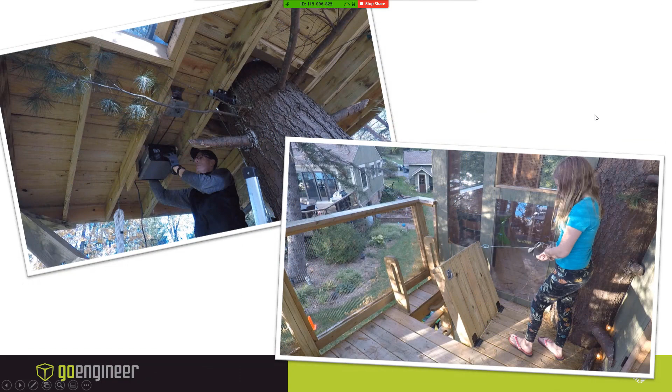A few summers ago, I built this beautiful treehouse and used weldment functionality, but with wood profiles. You get the same type of feedback with a nice cut list, but it's a great way to vet your project. Now, a treehouse isn't really good unless it's fully equipped with a garage door opener, so my daughters helped me do that last summer. Now all we have to do is hit a button and the trap door opens and closes. Some great things happening. And of course, I vet everything in SOLIDWORKS - it's just how I do things.

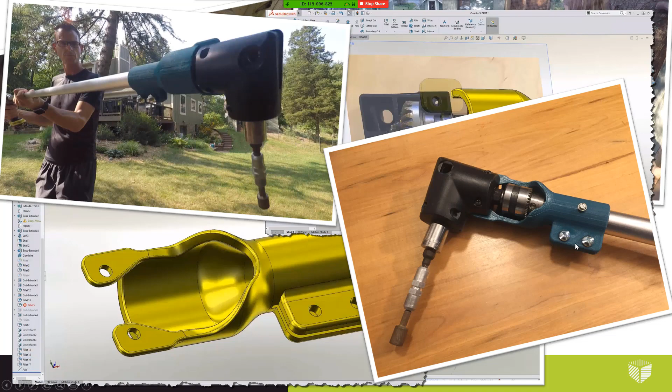So I'm a big fan of 3D printing - you're going to see a lot of that again on our YouTube channel. Whenever you get a chance, 3D printing is a fantastic technology that's really just getting better. I saw my first 3D printer in 1989, and it was what sparked me to become an engineer in the first place. To this day, I use mine at home often to repurpose things. In this case, I wanted to fit something that looked like it was meant to be on my boat, so I chopped up a trolling motor and repurposed it with a couple nice parts that were designed in SOLIDWORKS.

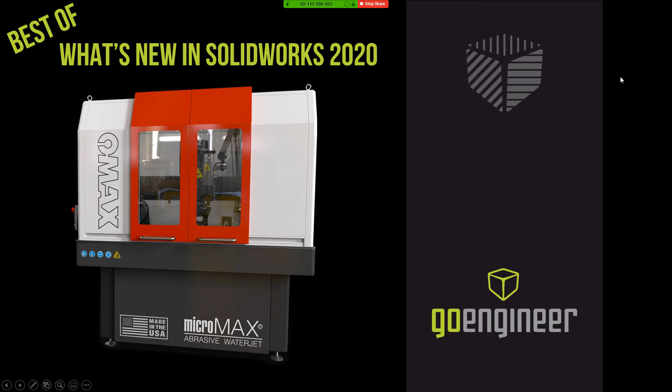We're going to stick to three themes. SOLIDWORKS is always good about sticking to a particular topic. We're using some files from one of our customers, Omax - they're an abrasive water jet cutting machine company, and it's a really fantastic product which fits well with the things we're about to show.

So we're going to start with improve performance. The first thing is detailing mode - this is something you're going to have to feel on your own systems to really get the idea. What's happening with detailing mode is we're opening up the drawing without even having to have the models or assemblies resident. It's different than the old detached drawings. You can take this drawing, send it to somebody in email, and they'd be able to open it up in detailing mode and do 90% of what you'd typically do - add annotations, details, move things around, add things like that.

So I'm going to show you a few things we can do right here, but the main thing you'll have to feel is how quickly this happens on your own documents. We're just going to do a basic file open here - I want you to see how fast this actually is. When we select our drawing, you're going to see a new mode selector. This is part of the user interface, and it gives you an idea of what can happen in any one of these different modes and what's accessible. We're going to open this up in detailing mode and watch what happens here - this is a 5,500 part assembly.

I just clicked open, and you can try to count, but it's only going to take about 5 seconds for this thing to fully open. It's a pretty tremendous thing. All the line art is here. The assemblies aren't even resident in memory, so the math footprint is reduced incredibly.

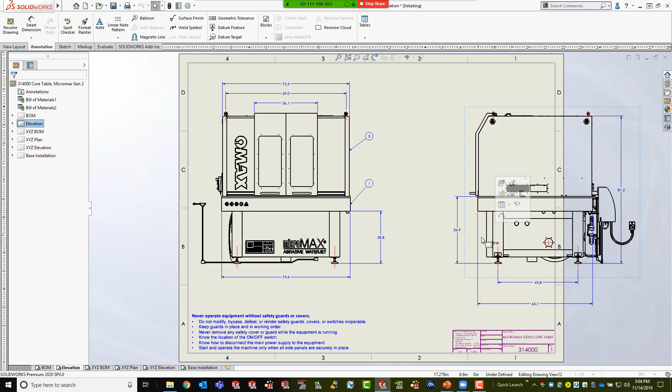These views can be removed and moved. Annotations can be tweaked if necessary, as you can see. And then basic things like cut, copy, and paste are available here as well.

Now we can add sheets and again do the 90th percentile of things that need to happen. Maybe paste this view back onto this sheet and put it wherever it needs to be, even reorganize things as necessary. The main part about this, though, is that it could be a lesser skilled or a lesser overhead employee taking care of these things that are really just the necessary things to get a project done.

And when it comes to annotations, there's a lot of different ways to do these. Things that I like to show here, just like anything else we do in SOLIDWORKS on the Windows interface, is going to be available based on whether these buttons are even available to you. So that's your first prompter of whether or not these functions are even available.

So things like just adding annotations and doing these in our Smart Rapid Dimension mode is a pretty typical way. One of the things I like to show quite often is that there's functionality that a lot of users overlook, things like these little dimension palettes. It's really easy to go ahead and add little annotations and tweaks, maybe add the word typical here. Oop, little fat finger there, excuse me.

You know this is live. And there's other things that we've added too.

Like in 2019, we took bill of materials, and if you selected them, you could make them all uppercase. Well, we've actually added that here to dimensions. So if you select it and say all uppercase, it wouldn't matter how the annotation was populated. It's going to take care of it and show it in a more appropriate manner.

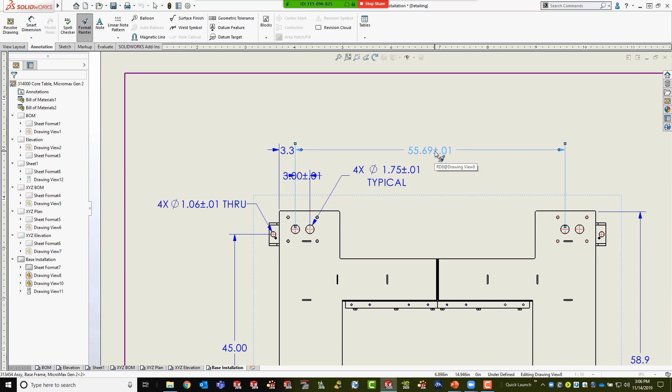A couple of the other things I love to show are things like Format Painter. This has been in the software for almost 20 years, but when you simply select an annotation and then click other annotations, it takes the format from the original source and simply pastes it to the rest of those. Really, really easy stuff.

The main thing that I want to show you with this, though, is the fact that you can do almost anything here, even up to the point where you're going to save, and you still wouldn't need to have access to the files. Now, at this point, when you do go ahead and try and save this document, it is going to prompt you for a little bit about what's going on.

And if you feel the need to, you could resolve this at this point, but there is the ability to save without resolving. In my particular case, we're going to go ahead and save without resolving, but we're going to do what is typically done with these large assembly drawings. And that's not necessarily saved as a SOLIDWORKS file, but saved as a PDF or a DXF or a DWG. Because the line art's resident, we can do this.

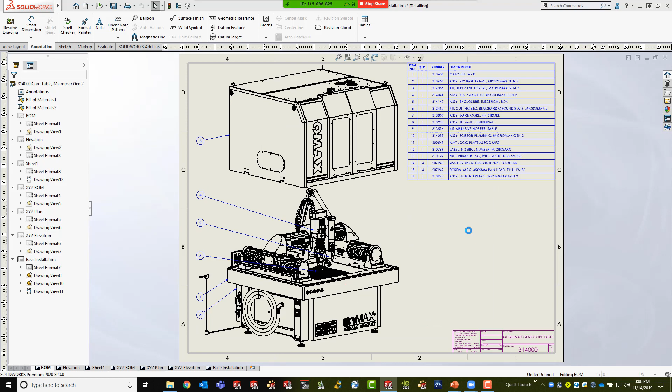Now, when I go ahead and save this particular document, what we're going to see is just how pristine the line art is. Really, that's the main thing that's there, but it's the rapid, most common operation here with these really large drawings. Now that popped up over on my other monitor, so let me pop this over. But you can see very cleanly that all the drawings look there, the revision clouds I placed are there. Really fantastic functionality. So do this on files that you're intimate with.

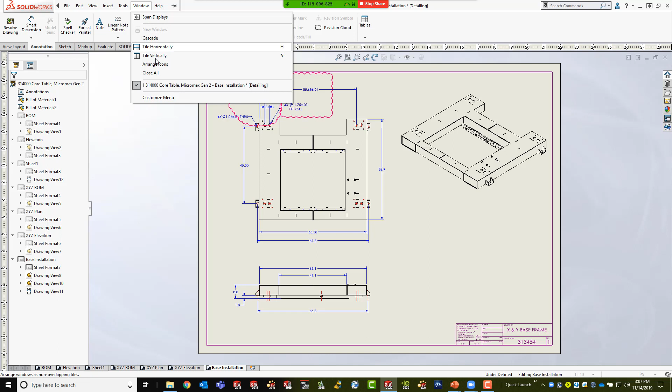You're only really going to feel the functionality when you open up a large assembly that you yourself have struggled with waiting for the drawing to open up, and in many cases, again, just for these lower level functionality and tasks.

One of my favorites, though, without a doubt.

Now we're going to move to envelopes. This is an interesting functionality because it has to do with external relationships and how parts interact with other parts within an assembly.

With the topic of external relationships, there's functionality under Tools and Options, your gear icon at the top, that enables you to control when and where somebody can add a relationship. In some cases, people get top-down relationships accidentally because they edit a sketch and accidentally drag it to an edge of a part, creating a coincidence.

This enables or disables the ability to have that happen outside of an envelope functionality, which I'm going to show you now, or within the top-level assembly, and maybe only allowing it at the same sub-assembly level. So there's greater control over where those external relationships can even proactively or accidentally be applied.

Now when it comes to envelopes, I want to show this to you live in a couple of different ways, and I got to set this up a little bit using my OMAX machine. Envelopes usually represent a particular area - either a keep-out area, a work zone, or maybe in a reach study.

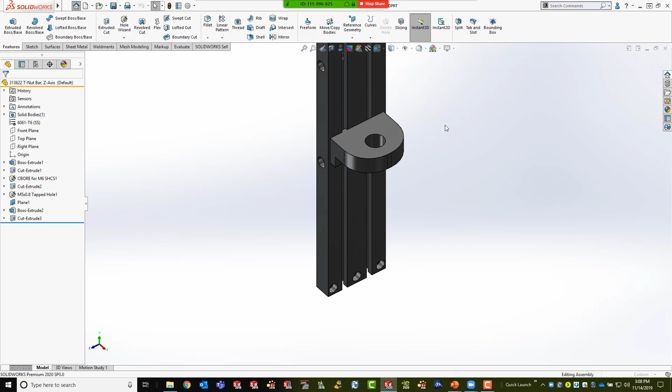In our particular case, what an envelope is going to represent is the cross-pollination, if you will, of data from one file to another, in order to create more appropriate links in the file in which those relationships or references should take place. I'm going to do that right now by opening up a couple of parts here.

So we've got some plumbing that I've just opened, and we've also got a bracket. What I want to do is open up the bed assembly in this OMAX abrasive water jet just to give you a little context of what we're talking about.

Now you see the plumbing hanging right off to the right-hand side. The bracket that I opened is actually part of the subassembly you see in the middle. For the sake of proper compartmentalization, this is the proper way to set this assembly up. But at the top level assembly, this head and this plumbing assembly need to interact with each other.

This is where a lot of overhead on the system takes place, and frankly it just becomes a more difficult operation, because now I have to turn this into a flexible subassembly, and now we have mates solving at the top level as well. Well, we can absolve this of all of that overhead by using envelopes.

Let me show you what this does. So to remind you, back here we have our plumbing subassembly, and all it is is just piping and fittings. Back here at the top level assembly, I have a bracket right here in the middle, and I need my plumbing to interact with that.

So we use this button at the top called Envelope Publisher. Now when you select it, the interface here is real simple. We're picking the components that we want to push down into other subassemblies. Doesn't matter where they reside, but we're going to push those references into the other subassemblies.

So I'm going to pick this bracket. Then we select the subassembly or assemblies that we want to do this in, and it could be multiple simultaneously. For our sake right here, what I'm going to do is just select from the feature tree so it's real clear to you - we're going to put this into this scissors assembly.

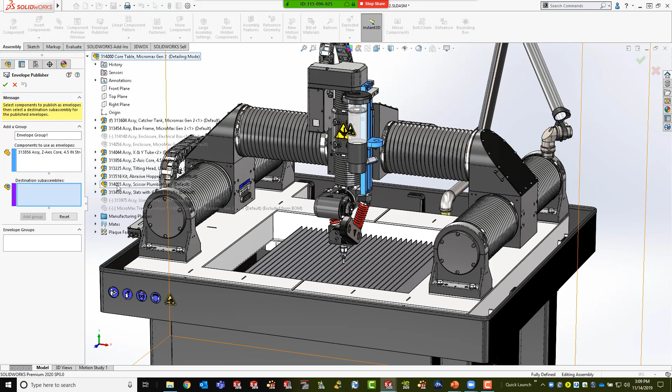And when you click Add Group, this is an opportunity for you to do this over and over with different references before exiting the tool. Groups are used in a lot of different places. So once this is done, it creates the group.

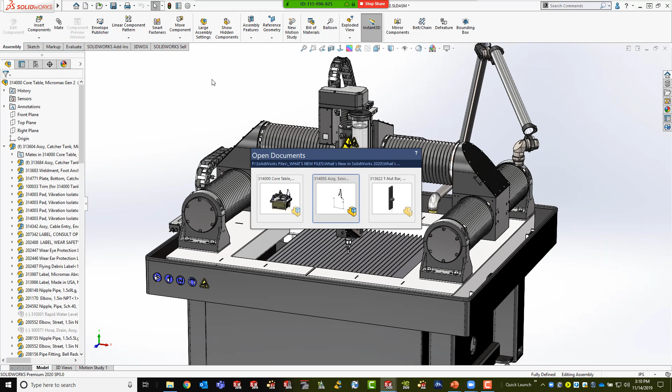What it effectively does is create a reference from the central assembly, from that head assembly, over to the plumbing assembly. Let me show you how this plays out. Once we go ahead and say OK to this, I'm going to toggle back over to my plumbing assembly. Take a look at this.

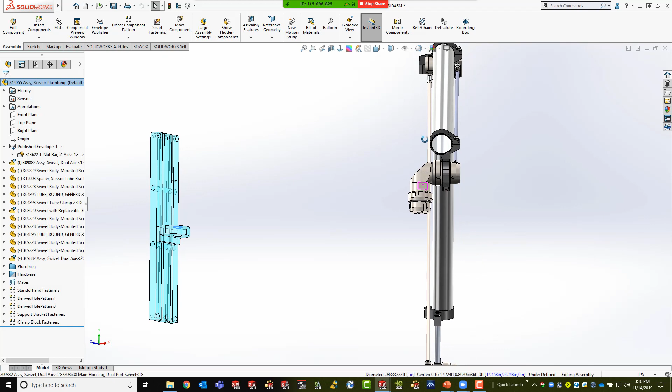What we now have is a transparent representation and an envelope folder here containing these, that shows us the exact position of this part in the other subassembly at the top level where that envelope was created. The purpose here is that I can now create the reference to that part here at the subassembly. So here we can easily go ahead and put an edge selection, maybe grab our plumbing, and let's just go ahead and use a little profile center mate.

Now the parts can move because the mates solve here. And because we're referencing that part now at this subassembly, as we toggle back over to the top level assembly, our plumbing is going to be in the proper position.

Now the reference didn't have to take place at the top level assembly. It's the way the envelope pushes down. If this head assembly ever moves, the bracket moves, and of course the reference in this scissor subassembly is going to have to move as well. So it's a great effective way to make this happen.

Now we have limited time here today, but I want to show you a second example of this because I think this captures more of what a lot of you might do out there. This assembly I've been using since 1998, so it's officially, at least in Michigan, old enough to purchase alcohol.

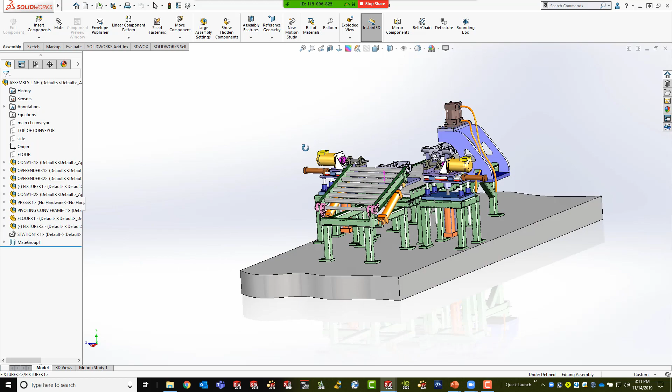What I have happening as context here is we have a subassembly of an assembly line. In this particular area we have a press which happens to be floating in the middle of space with a stand that's yet to be generated.

If we open this press in its own window—of course those are old files—you can see that again it's just floating in its own window.

So back at the top level assembly, I'm going to use the envelope publisher to push the floor from whichever subassembly or level of the assembly it's in down into the press assembly. Simple. I could press all the assemblies I wanted to and put that floor in them all simultaneously.

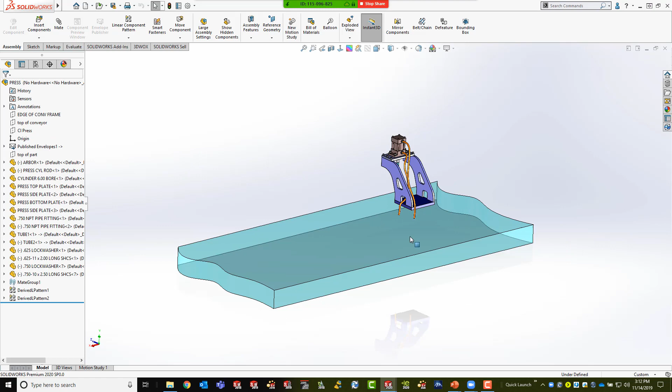When we toggle back over to the press subassembly, you're going to see now that we have that reference down there. And now real easily, all I actually have to do is create a basic feature.

Here we're going to go ahead and put in a sketch. We're going to do some offset entities, which is going to be real quick. And then I want to just go ahead and create a nice extrusion here.

So again, basic features. We're going to extrude this, double clicking our face up to surface. So there we have it. We have a feature that's now referencing the floor in this assembly.

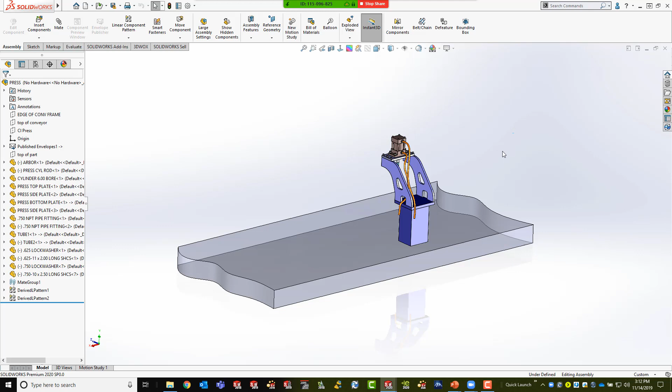Now when you go back to the top level assembly—this is why I wanted to show you this—we're going to make a change now that changes the floor. And as you do this, it's going to reveal the fact that the floor is actually concealing that little envelope graphically.

Now, of course, if the floor moves, the envelope created from it moves, which means all of our references update. Here's a little rebuild, and there you go. So I think it's fantastic functionality.

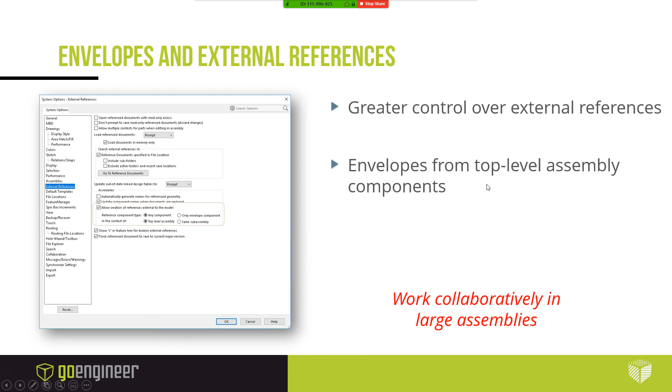It will definitely enable or promote performance because it won't require you to have to do as much flexible subassembly capabilities at that top level assembly. Really, really great stuff though. Okay, let's keep moving here.

So we're going to get into this next one here, flexible components. And this is going to be the last of the ones that are really, really detailed demonstration live for you. Because this one here is really awesome, but I feel that you need to know how it's set up.

Because what it's set to do is turn a part that's rigid, which all of our parts are built as rigid nominal parts, and it turns it into a part that will now flex and move much like a spring or a boot would based on some part references.

But what we're really doing is we're remapping some external references. What that actually means is that we have to create those external references to begin with in order to be able to remap. And that's where I want to show you where this thing works.

So let's go back into SOLIDWORKS here. And again, we've got some really great videos online that take a look at this. I did a top 5 video that's on our webpage as well that really explains this out.

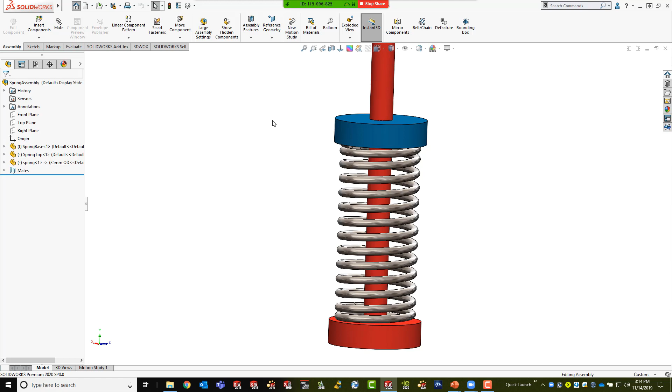So I've got 2 different assemblies that I want to open here for you just to give you the context. These are the sample files that actually install with SOLIDWORKS 2020, so you can try these yourself if you'd like. What we've done over in the right-hand assembly is we've created a spring, and the spring's functionality rebuilds or updates when we change where this blue part happens to be.

Now we do this in user groups and in videos all the time to show you how you can have a sketch reference for a sweep down the middle, and that sketch referencing the blue part and the red part.

As the blue part changes, the length of the red part, the sketch line, changes, which then updates the spring. There are ways you can search out how to set this up. The main thing happening here is that the spring has a top-down relationship in the form of a plane, and that plane is coincident to the bottom of the blue part for this example.

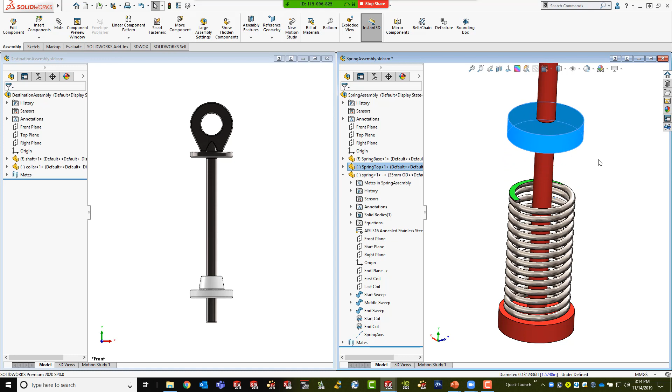So in this assembly, we've generated this relationship so that if the blue part moves, the plane moves, therefore your spring compresses or extends. That's something people have been able to do for a long time, but this is where it always falls apart.

What I want to do now is use that spring in another subassembly. That's where it would give you an error in previous releases of SOLIDWORKS that says this part has top-down relationships created in another assembly.

Now we're going to allow us to reassociate that relationship to this part. We'll do it simply. There happens to be an axis down the middle of this part, and we're just going to mate these parts up so we can locate them.

Easy enough. Down at the bottom, we've got a simple ground face, and that's going to be coincident to this top part. Nothing mystical there. What we've generated now is a part coincident to a part. So as we move it, they move.

Here's the magic: pick on the spring and click this button called Make Part Flexible. Once we do, it reveals that top-down relationship we designed in this seed subassembly and allows us to re-reference it in this assembly by simply picking a face.

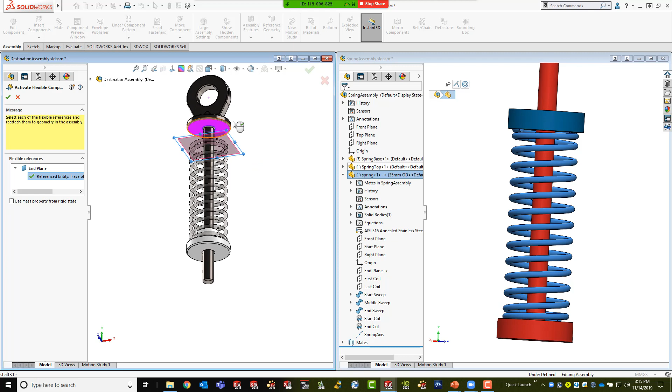What we've now done is repurposed that part and turned it into a part that, as it moves, is going to automatically update and expand or compress.

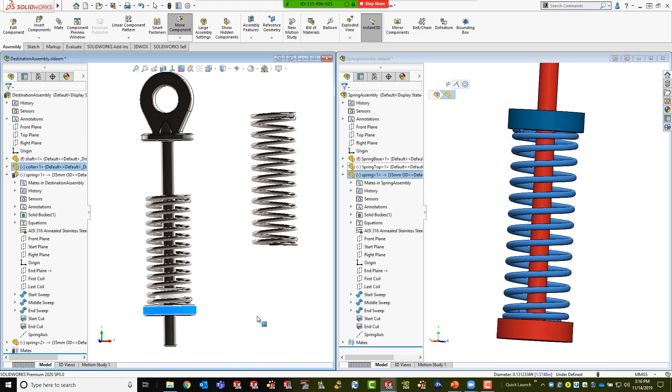Now if you thought that was cool, it gets better. I'm going to do a second instance of this part, and you'll notice that each of those instances, though they'd show up as a quantity of 2 on the bill of materials, can have completely independent extension or compression positions, because each can be an independent flexible part with different relations.

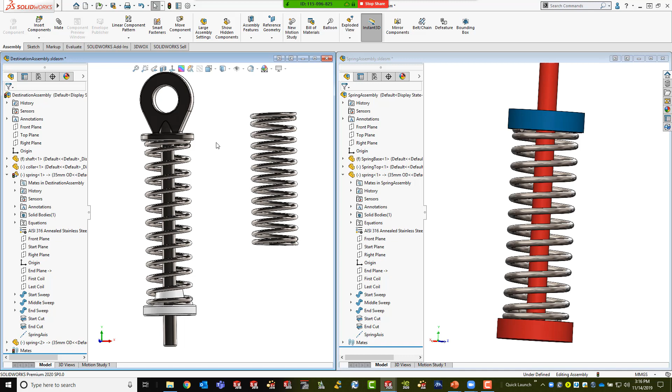What that translates to is this one spring could be used everywhere in an assembly it needs to be, and be in a completely different state of flex based on this functionality. It is tremendous. So we set up the seed, not difficult to do, and then the world's your oyster in how we can make that happen within any subassembly you'd like to consume it in.

So I really love that functionality. Seek that out on our webpage again if you want to see that in a little bit more detail.

All right, moving forward, assembly mates. I think we've been doing mates for 20 years, so we wouldn't have much more we could add to this. But I've been using SOLIDWORKS 2020 for about 6 months now, and I went back to 2019 for a previous project, and this one threw me for a loop.

Because of the things I had in 2020, I now really wished I had in previous releases. Things like being able to use the Quick Mate toolbar with more rich access. In this particular case, if you pick 2 flat faces, you're going to get additional distance limit and angle limit mate capabilities on the Quick Mate toolbar.

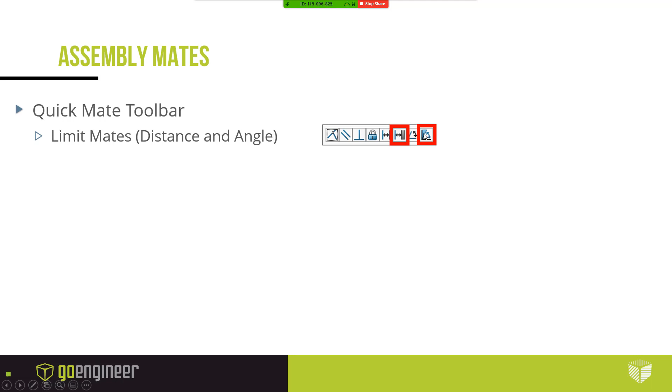Now the slot mate also comes up if you pick slot geometry and some other circular or cylindrical face. But on top of that, once you select the slot, it's going to prompt you for the granular details of the position, whether it's centered or free within that slot.

Same with the width mate. You'll be able to select 4 faces, pick the width mate, and it's going to give you the fine-tuning details available. What's also great is that with all of these, it's going to automatically pop up a flip mate alignment button.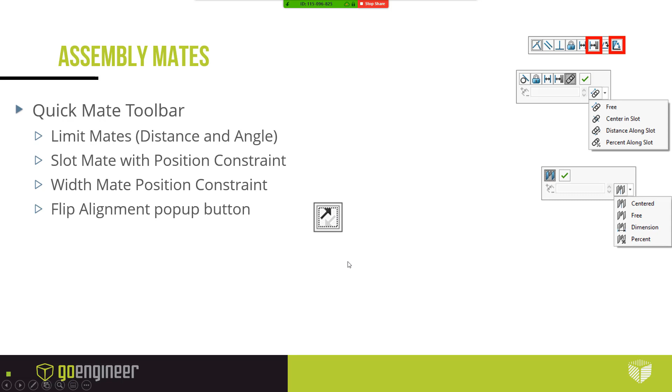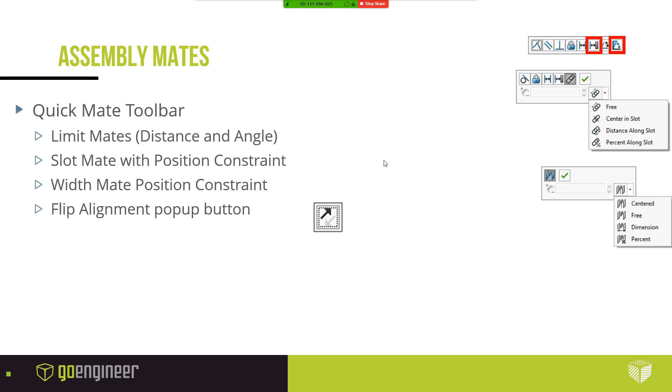So you don't have to do that little tweak to a part and roll it around. When you want to put 2 faces coincident, they're going to be closer to the coincidency of the face alignment. Just put it on and you'll immediately be able to realign if it's the opposite of what you need. No tweaking necessary.

With the width mate, you can right-click its mate in the feature tree or on the breadcrumbs and access flip mate alignment as well. You actually had to edit the width mate to be able to flip the mate alignment in previous releases. So great stuff with those.

When it comes to assembly patterns, mirrors and patterns are the same things. Now with patterns, we did some things with 3D patterns, and most importantly 3D hole wizard patterns, because when you do a 3D hole wizard pattern, faces or features and holes can be opposing in position. Our pattern-driven patterns, which would be a fastener pattern into those 3D holes, will now honor the orientation of all of those holes wherever they happen to be throughout the assembly, as opposed to aligning to the seed.

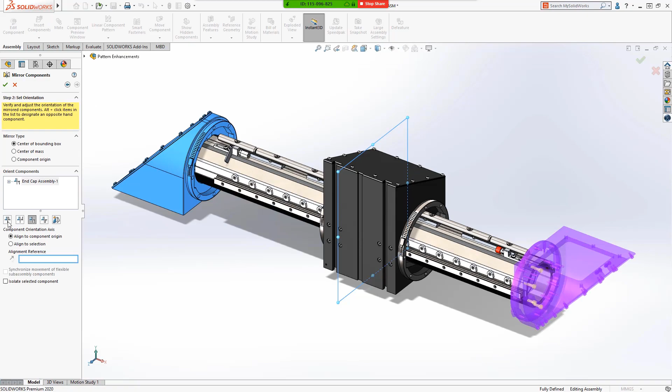What I wanted to show you on this one had to do a little bit more with mirroring. Now with mirroring, what we're doing here is giving you a more rich user experience. First of all, when we go ahead and do mirror of components around a plane, we're going to have some capabilities to position that's a little bit more obvious, but we've added a new one here.

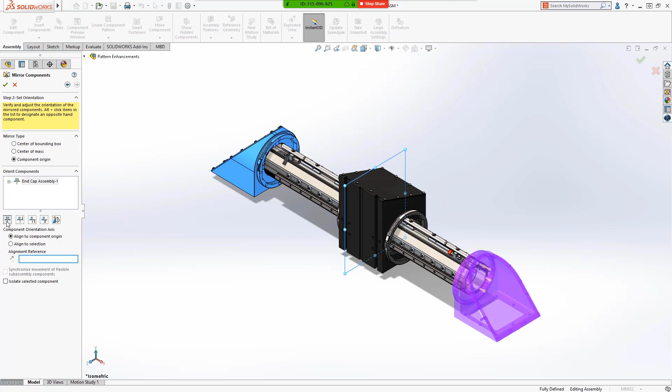Prior to this, we used to only have center of bounding box or center of mass, but the component origin for parts that are non-symmetrical was always the better option, so we finally added that. You can see that's a very, very small distance. And then the buttons for orientation, they're a little bit more obvious just because of the way that the icons have been positioned. So not earth-shattering, but I've gotten a lot of reactions to this through the live road shows, just simply because of how the users felt about some of these things that are more annoying than anything that have now been addressed.

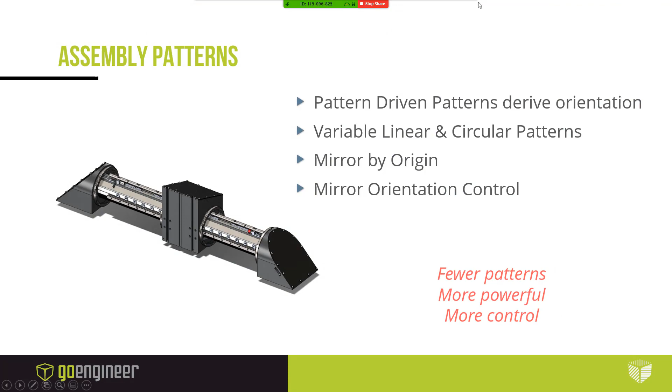Markup is something that we introduced in SOLIDWORKS 2019, and for me, I thought it was great, but it had 2 major flaws. Number one, it relied on a touchscreen computer, which I didn't have, so I guess I was a little jealous. But number two, it only worked in parts and assemblies, which was great, but traditionally, red pencil markup happens on a 2D drawing. So that's where we've gone with this with SOLIDWORKS 2020.

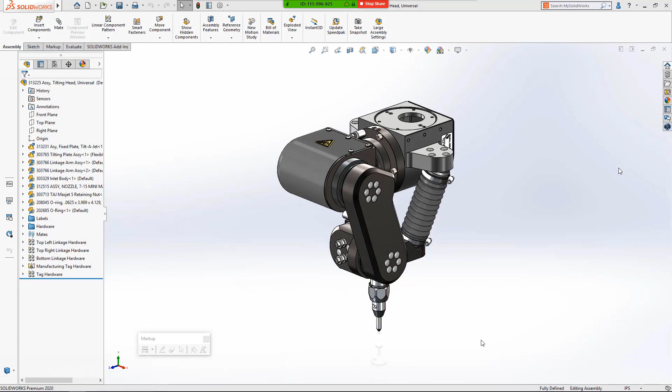Now I can't demonstrate this for you, so I'm going to use a little demo magic and have some inset window with one of my friends here who used his touchscreen to do this for me. So what he's doing is just simply showing you that there's a pencil tablet. This could be a Wacom tablet, this could be any computer that comes with a touchscreen. Really a lot of ways to deal with this. But of course they're simply orienting and putting notes on the 3D assembly.

Now in this case it actually stores each of these positions in a folder in the feature tree. You can easily preview those. You can also easily reorient to see those because of course the orientation that the note was placed on is really pertinent to what that note means. Now, when all is said and done, you can take those notes and save them out as common image files, things like JPEG and PNGs, or a PDF file if necessary.

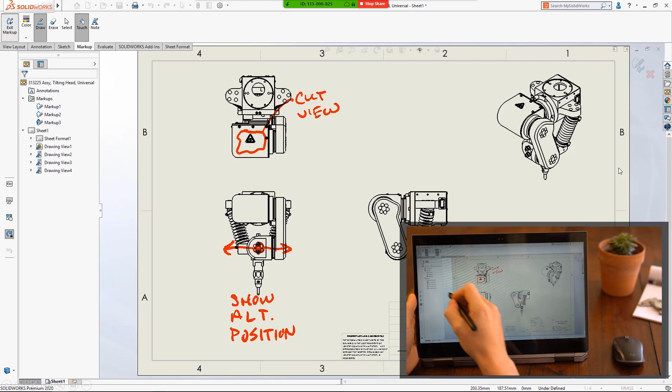But the real magic to this now is that we can now do this not just with a pen, but now we can actually do this with your mouse and on a 2D drawing. So both of those. So the 2D drawing, again, more traditional. We're going to put those notes in, and in the same way, we're going to store them in a folder in that feature manager.

Now, this is going to live with the document. So when you send it to anybody, whether they have a touch screen or not, they're still going to be able to consume this. And whenever they've addressed whatever that note depicts, they can easily just hide it. So that allows us to really keep the communication on the drawing where it's meant to be.

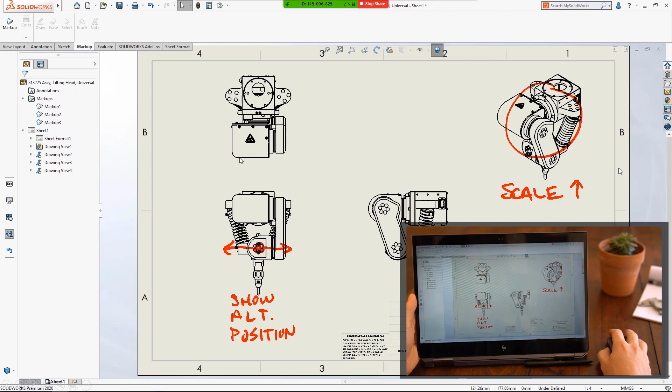But again, you're not left out if you've just got a regular mouse. In this case, we can go ahead and click the markup and pick our color and thickness of our lines, and then again, just simply sketch directly on the drawing. So really, really great enhancements this year. They were the first 2 enhancement requests that I put in last year, and I'm really glad to see that those were taken care of: mouse support and 2D drawings.

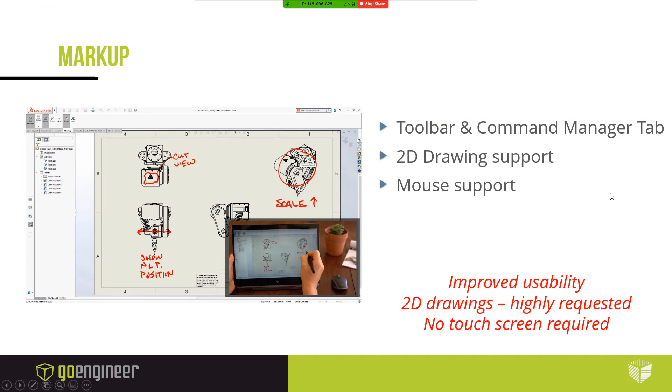Have you ever had a broken fillet? It's really a rhetorical question, because you haven't really used SOLIDWORKS unless you've had a broken fillet. So we've got a way to now repair these missing fillets automatically.

What's interesting about this is that it allows you to anticipate this a little bit if you know what you're working with. I feel it's really necessary to demo this live because you need to see the workflow that leads up to this.

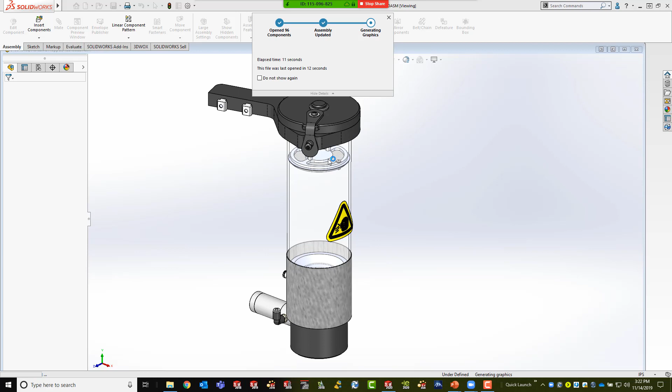This is something that happens to all of us. We have a design change that happens for a reason, but we don't want to be penalized for that reason any more than we have to. So in this particular part here, we have this filter plate.

For the sake of configuration, we might have one of these that has these holes in it and one that doesn't. So what we're going to do is roll back a little bit beyond our fillet and our hole. We're just going to make a small change.

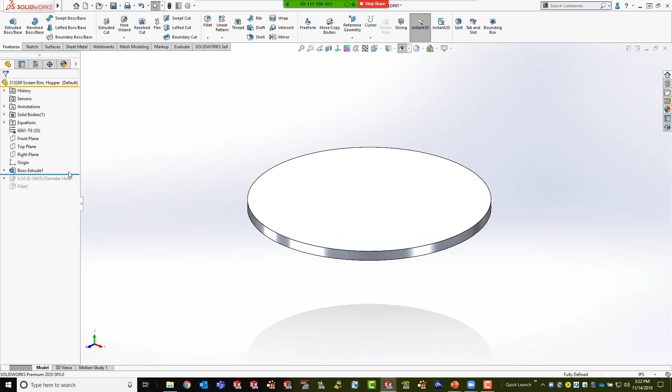To do this, I'm going to edit the feature, but use a little contour select, and we're just going to use the outside. By the way, if you ever participate in Model Mania, brush up on contour select - definitely necessary. So with this, we go ahead and select that same sketch.

I'm going to use that sketch again to create a second feature, a cut. The purpose of this is simply that now I don't have to have two different parts here. What I can do is just have one part with multiple configurations.

Oop, didn't quite work that. Let's hit that one at through all. How about that? Yeah, it's a little better.

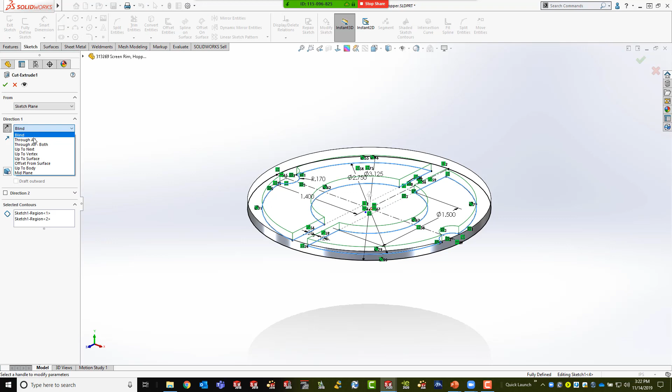Now, as we go ahead and start to roll back down, my holes are going to update because they're related to the sketch, but alas, all of my fillets are broken.

Now here's where a right click is going to save you. Right click, edit feature, and it will show you, just like we have before, the missing edges and all the dead silhouettes on screen of where those fillets used to be.

The fix now, though, is you right click them and say repair all missing references. Magically reattaches those. Now with that, I got to tell you, it won't work if those edges aren't in the same position.

So if you do happen to change the offset thickness here, change it to make the cut, then update your fillets, and then change the offset distance of that sketch - because it will repair them, and once they're reattached you can do just regular SOLIDWORKS associativity. So it's very important that you do that in the right order.

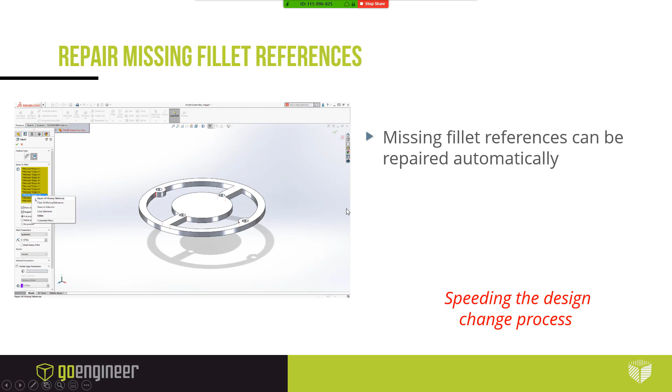It's not magic, it's not going to find those edges if they move, but if you know how to work that, then you know that you want to do it in a particular order before you actually go through the process of editing any other features.

Surfacing has a very similar thing. I've always had problems with - and so has everybody else - the offset surface tool. I want to demo this one live to show you some of the things we've dealt with. I've gotten the most customer reaction from this one live as well.

When we're offsetting surfaces, a lot of times we have these internal features here that collapse back on themselves. And if you've done this long enough, you anticipate that, but it doesn't make it any easier to deal with.

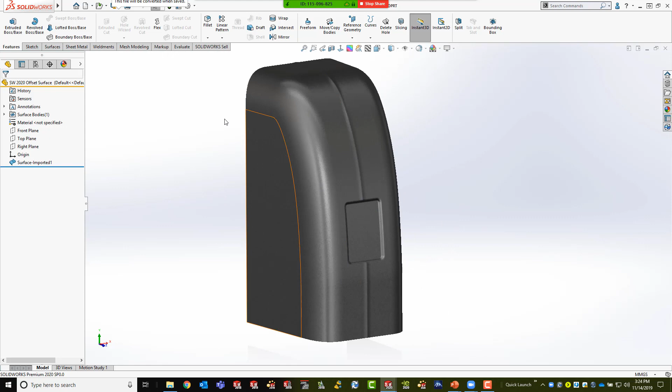So here with our surface tool, what I want to do is just take this entire surface, and we're just going to do an offset.

Little bonus here - we don't have a copy surface tool, but if you set this to 0, you'll notice that it actually says copy surface. Kind of cool. For our purposes though, we're going to bump that up to 5 millimeters.

So I got a good preview out here, and of course, as you know, anytime you have a preview, you're guaranteed to get good results, right? Well, not with surfaces. In this case, the offset creates self-intersecting geometry, and this is usually where you're manually stuck trying to deselect and filter out the features that failed.

Not anymore. It's going to identify the failed faces, which is part of the problem, and then you can now right-click and remove just the failing faces, keeping just the good ones.

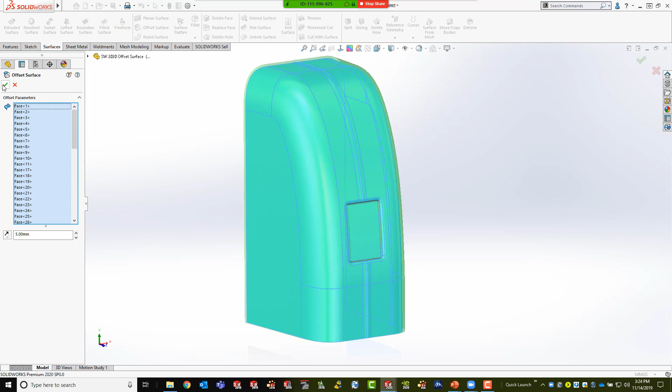That'll allow you to go ahead and create the offset and then deal with whatever little idiosyncrasies and edge overlaps you might have after the fact there. So that's the kind of thing that's really going to save a lot of time when it comes to generating these types of offsets and then being able to just deal with simple trims and extends in order to clean that up. Great stuff though.

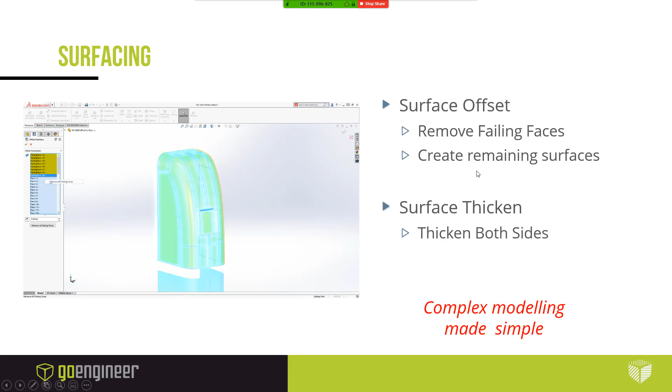Okay, so last couple of things I want to get into here. Drawings are pretty important. Everybody does drawings still.

Some of the things I want to show you here are tools and options. You can also set uppercase for dimensions and hole callouts as a default feature, uppercase for anything, and that's saved with your document. It's actually saved in your templates. Important thing to know there.

And then some things you can do with alternate position and drawing scale. There is a file called the drawing scale txt file, and it's just like your hole callout format txt file, where you can customize what scales actually show up in the lower right-hand corner of your drawing sheets for the scale changer. So a couple great ones there.

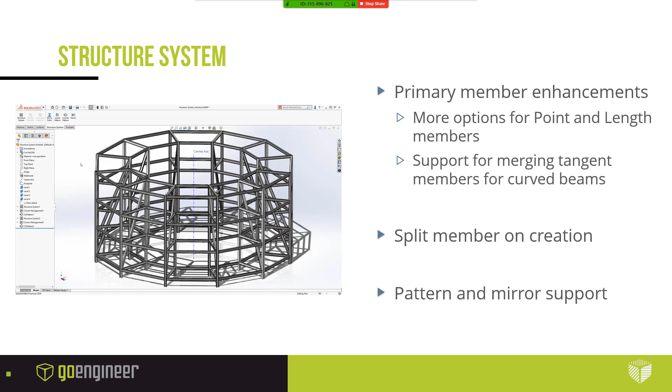I don't want to get deep into structure system, we have a really detailed deep dive on this. What I want to show you is that it's really just more of an append to the way you do weldments today, but it doesn't rely on the 2D and 3D sketch framework like it did in previous weldments. Structure system, the one you're seeing here, was actually generated by using this as the starting sketch feature. So it's tremendous what you can create based on not having to rely on a framework built of those 2D and 3D sketches. If you're big into making really large format welded systems, check out our video on structure system and see how the details of this work, because it really could be the thing you've never known you've always wanted. So please check that out.

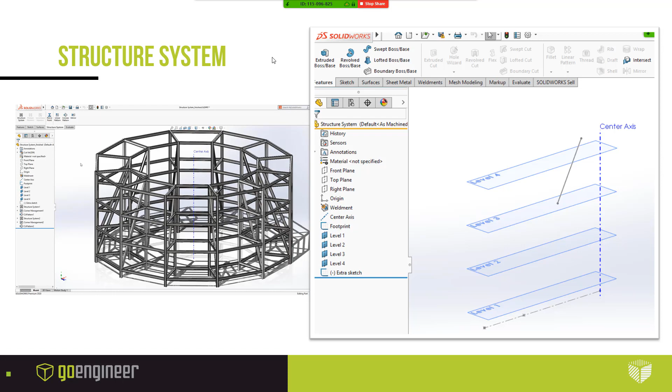All right, last couple of things and then we're going to wrap up here. Now I told you I'm a big fan of 3D printing. 3D printing is basically like 2D printing now in SOLIDWORKS. When you're sitting in the SOLIDWORKS interface, and I'm just going to show you this briefly, you're basically picking a printer just like you would a regular 2D print.

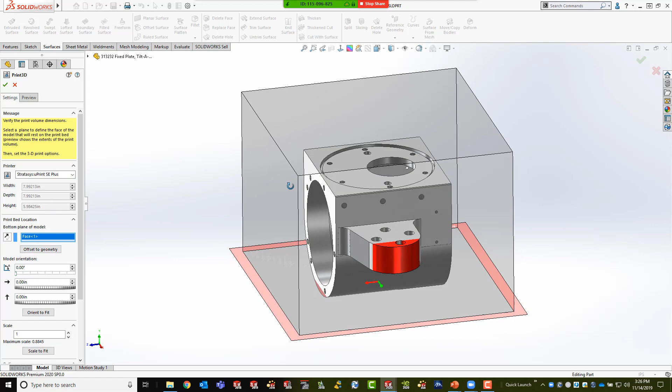Now, we've had File 3D Print inside of SOLIDWORKS for quite some time, but what it triggers now is access to the printers over on the left-hand side. And when you pick the type of printer you have, it's actually going to show you exactly what the build chamber happens to be and whether your print fits inside there. There are automated ways to fit it, both up to the build chamber and to orient to fit within the cube. And it's going to give you a lot of previews for things like your striations and your slices.

And all of these things get baked into this new 3MF file, which basically is a file that contains all of the individual 3D print data here just through a simple file save as. Now it's meant to be a black box file, so when you go ahead and save this 3MF, what you're also saving are things like the striations, the type of material, and temperatures and other details when it comes to what's included there. This is theoretically supposed to go to any 3D printer and go ahead and print without the need for a pre-slicer. Really great stuff there.

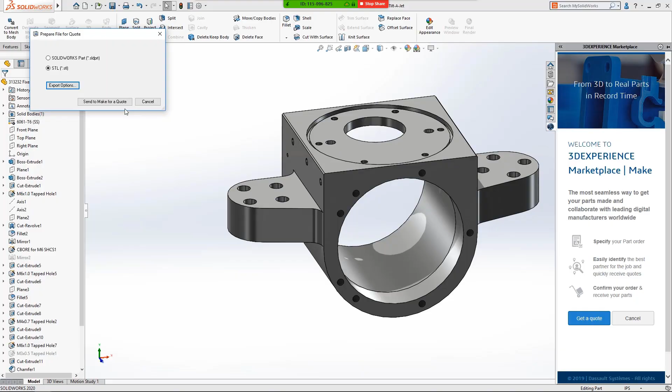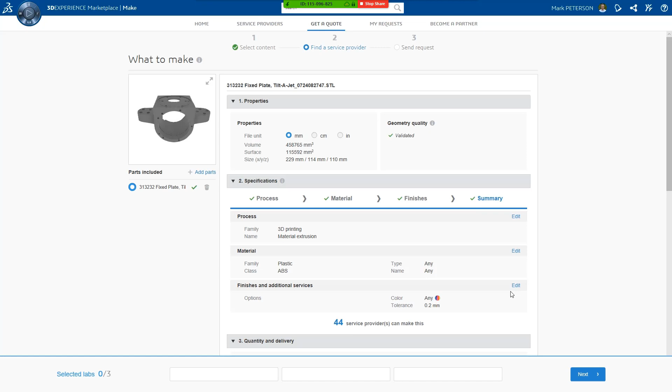All right, last two pieces I'm getting into are kind of peripheral. For 3D printing, we've got a mechanism that also allows you within our task pane to connect to the 3D Experience Marketplace, and in this case access people with 3D printers if you don't have your own. Plenty of people out there have registered themselves here as service providers. You simply pick the type of process, the type of material, maybe the expense you're looking to adhere to, and then it's going to go ahead and connect you with contractors out there that can send your part to you really as rapidly as overnight. So it's really a great service, but it connects people who don't have manufacturing and fabrication capabilities to those who do. So check that out. It's going to be in your right-hand tab there in your task pane.

Last two things I want to hit here have to do with a little bit more of our augmented and virtual reality pushes. The first one here is actually with EDRAWINGS. The performance of EDRAWINGS is ridiculous. You have to open up these files and see what it looks like on your own system.

But what I can show you here is when I go ahead and open up EDRAWINGS, I'm going to do some augmented and virtual reality, which is no longer beta in this release. If you simply say File in SOLIDWORKS and EDRAWINGS 2020, you'll see Open in VR. And to do this, you don't have to make some other type of file. You're just opening up normal SOLIDWORKS assemblies.

Now this is great for large assemblies that you want to show customers what they look like, or things that are going to be only one-offs, like large observatories that we did last year, where you really don't have an opportunity to make a prototype, and you still have to be able to show people what it's like to work inside that environment before fabrication takes place.

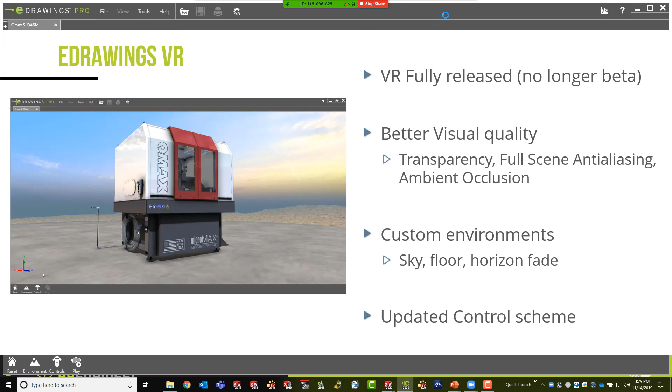Well, here EDRAWINGS is giving us some incredible graphics. And you'll see here that as we're looking at this, we're getting some incredible graphics, and it's starting to understand things like depth. So as we zoom into something and get through the glass, it'll change the graphics and really change the user experience at this point.

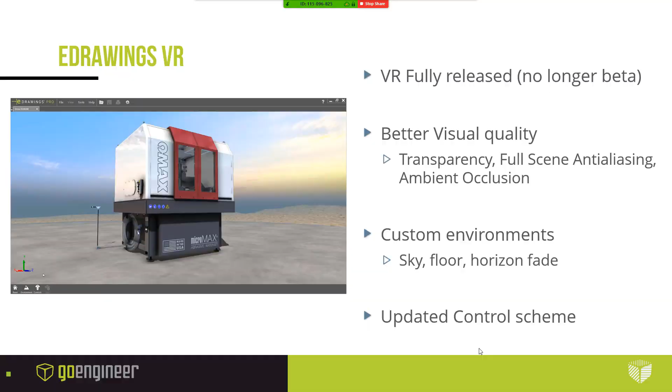But we have a lot of capabilities to be able to walk around this. I'm only using this on a regular SOLIDWORKS system, and I don't have access to the virtual reality tools that I'm about to show you. But with $500 on eBay, you can get an HTC Vive headset and basically immerse yourself in any SOLIDWORKS assembly.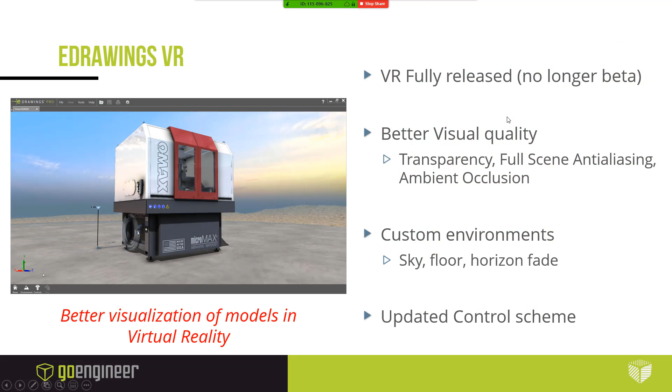So I love that. All right, last thing I got to show you is SOLIDWORKS Sell. Now, SOLIDWORKS Sell is not part of the core SOLIDWORKS product, so if you're interested in this, it's something we're going to want to have a conversation about. But because it is brand new, I felt it was necessary to show this to you.

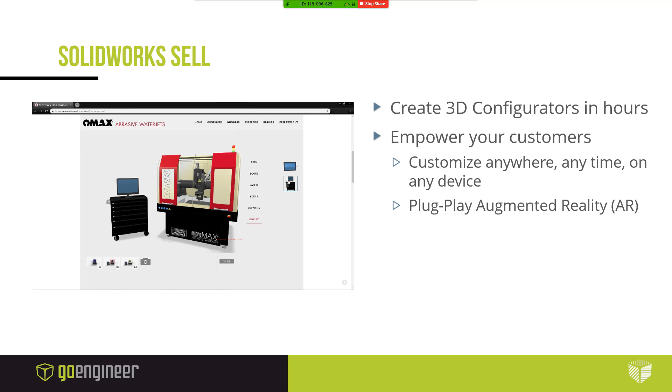SOLIDWORKS Sell is a configurator. And a lot of you have been asking for this, and usually these things are really difficult to deal with, which is why I'm so excited to show you this. This 3D configurator will create millions upon millions of iterations just by creating the permutations due to your input.

Now, we've used this with the OMAX assembly, and here it is live on a website. So you give opportunities for users to come to your page and really configure things in any way that you want. It could be materials, positions or configurations, as we're showing here with doors open and closed. There's a lot of different ways that we can deploy this.

What's interesting about it is the performance is tremendous, first of all. But what also happens with it is there's the ability to deploy this through a web page on devices like tablets and smartphones. So here, looking at it in just a regular computer's web interface, it's not going to be quite as dynamic. But if we open this up on an iPhone, you're going to see the ability to actually go augmented reality.

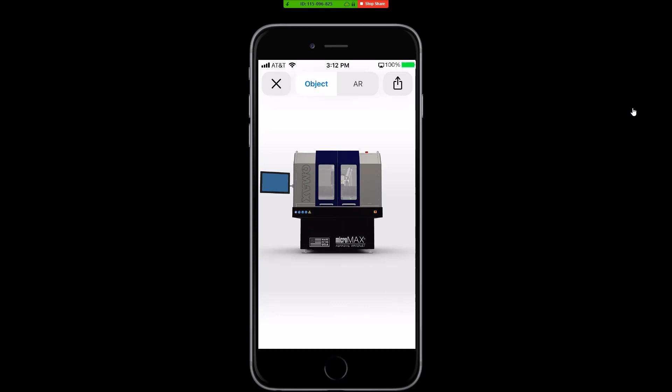Now, virtual reality is completely fake. You have a headset on and you're seeing nothing but generated stuff. Augmented reality is putting fake inside of the real environment.

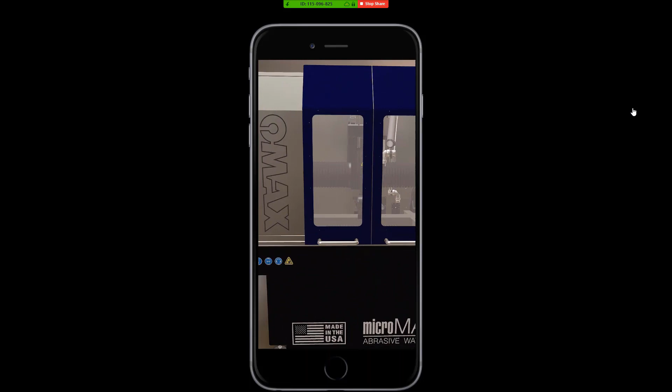Now, I'm showing this to you right now on this video, but what I want to do is actually use my Zoom meeting here to show you something pretty nifty. So what I'm going to do with the Zoom meeting, if you'll bear with me for a second, is I'm going to do a new share, and I'm actually going to show you my iPhone live as I do this. That's the first time I've done this, so please bear with me.

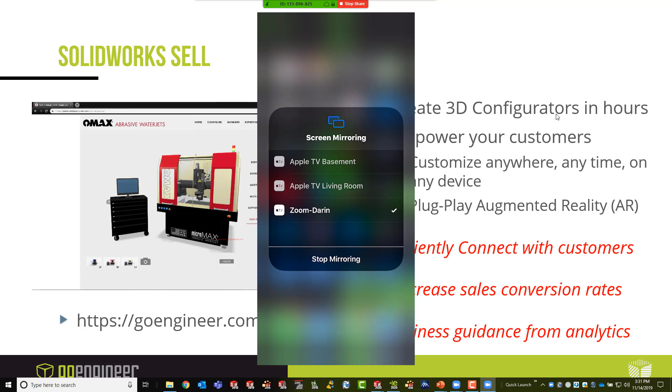So we click this over to AirPlay, and what it's going to do now is show you on the meeting exactly what my iPhone sees. All right, that's working pretty good. Now, when I go into Safari in this particular case, what I'm showing you is a web page that is our GoEngineer SOLIDWORKS Sell site, and you can go ahead and check this out when we're all said and done.

The main thing I want you to see here is that in the corner of the page on a tablet or a phone, you're going to see this icon, the augmented reality icon. As I click on that, it gives me the opportunity to roll my part around. Lower right-hand corner, you see augmented reality. Now as I click that, I can still roll the part on my screen, but if I click AR, that triggers my camera. Just so you know, this is absolutely live.

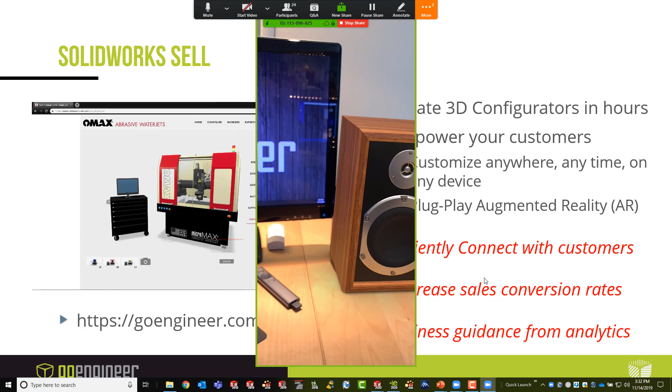I'm sitting here talking to you on my camera right now. All I have to do is point my phone at a horizontal surface, and once it picks up the horizontal surface, we'll move this right over, and there we go. What we now have is a speaker sitting right here on my desk, and it finds the horizontal surface and sits right here inside my reality. So again, I'm sitting right here, and there you go.

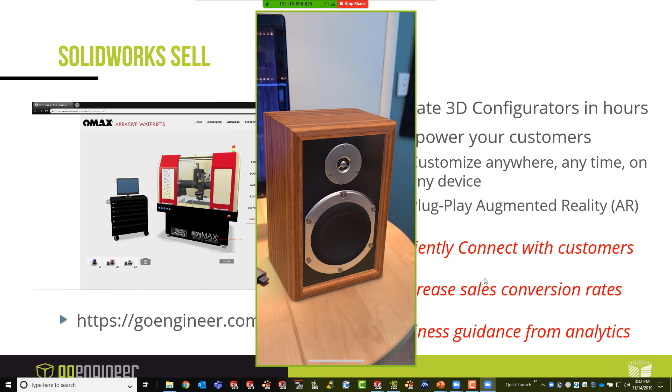So it's an amazing thing to be able to put your assemblies at a one-to-one scale. What's basically happening is they'll jump in and detect things like floors. So if you want to see a larger model on the floor, that's something you can go ahead and do as well.

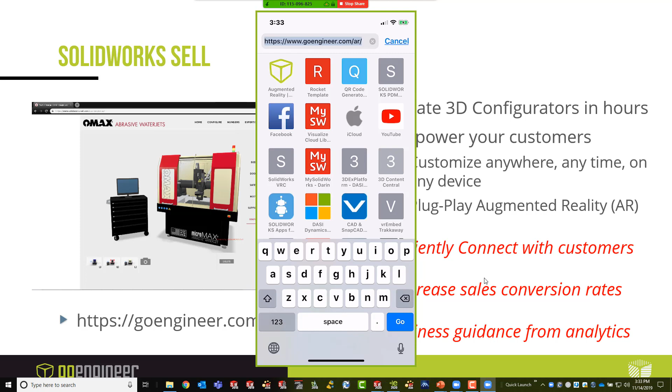Now if you go to our website, you can do this even right now. It is goengineer.com/AR, as you can see on the screen right now, and the lower left-hand corner of the slide when it comes back up. What you see on this is a page where you can grab any one of these. So if I go ahead and grab the chair here, you're going to see that this is the opportunity that you can do. These are directly on our website right now, so if you want to go ahead and grab one, you'll see the chair.

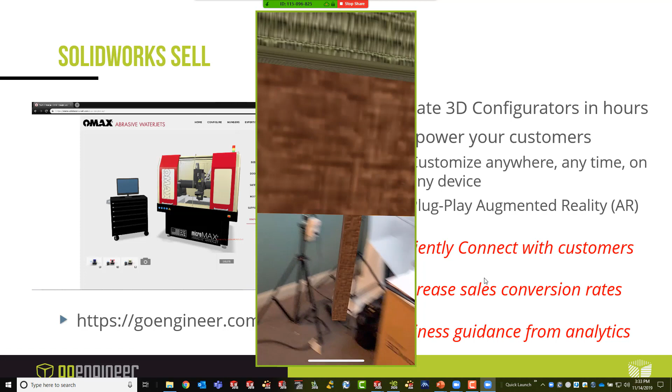Upper left-hand corner, you see the AR button. And again, if I hit AR one more time, this is the opportunity to go ahead and throw this on the floor of my office as well. So there we go, and we'll scale that down to 100%. And there it is, sitting in the corner of my office. So pretty crazy stuff that we're able to do using SOLIDWORKS Sell.

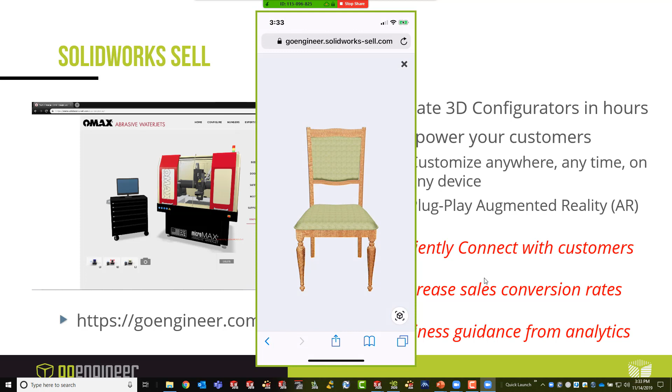All right, let's go back and get our share back to where we should be. So that's an interesting thing that we can do with these particular tools.